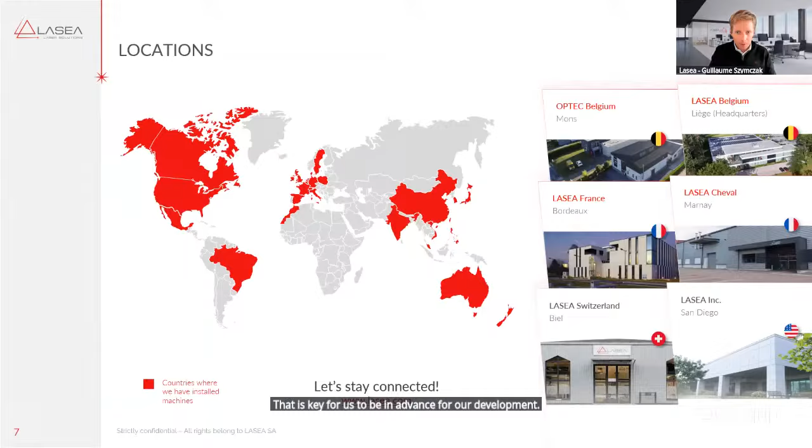And finally two sites in France: one is LASEA Cheval, which we acquired about two years ago, and Lasea France, where I am located, where we also develop modules that we integrate into our machines, but can also sell outside the group. The module we'll talk about today is developed by the French entity. In terms of markets, there are three main ones: luxury, everything linked to watches and jewelry; medtech, mainly tubes like stents, catheters, and intraocular implants; and finally electronics, where we do plenty of stuff like micro drilling, selective ablation, engraving, and so on. All of this is supported by the research and academic environment that is key for us to stay ahead in our development. We have machines all over the world, and here's a picture of our office.

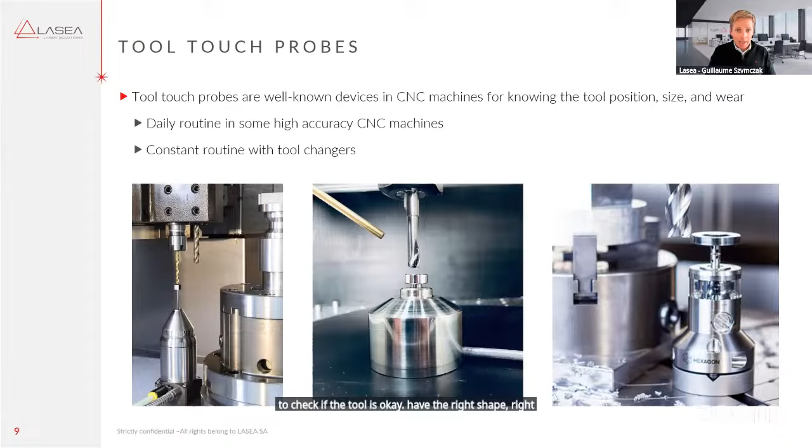Let's talk about Tool Touch Probes. Today, in the state of the art for CNC machines, the Tool Touch Probe is very well known. Everyone knows that the tool is something that needs to be changed—it's a wear part, and this part has a definite impact on the quality of the part you produce. It's very common in CNC machines to have a daily routine to check if the tool is okay, has the right shape and performance, and to be sure the machine is in good condition. But what about laser systems?

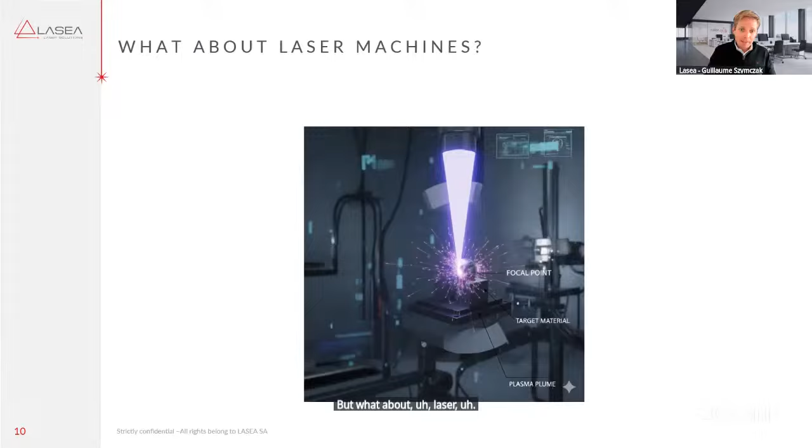In laser systems, we have an issue because our real tool is light, but the light we want to use is at the focal point, as you can see in the picture.

And this is where you have interaction between the light and the material. So if you put any tool in, you have a risk to damage it. So what is commonly done, in fact, we do a lot of assumptions at the end of the day.

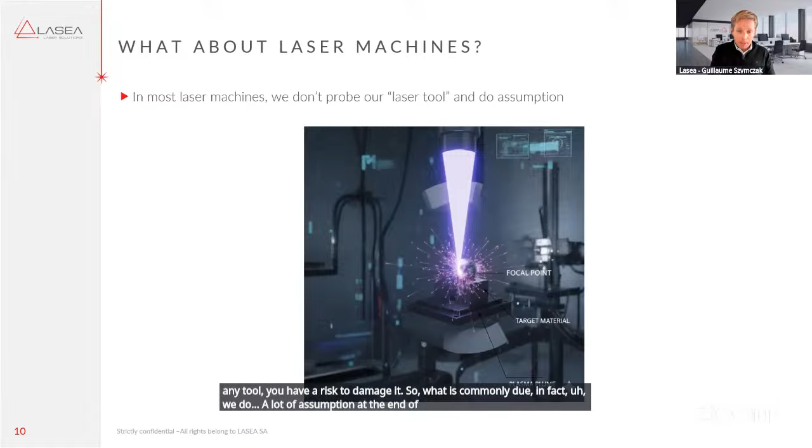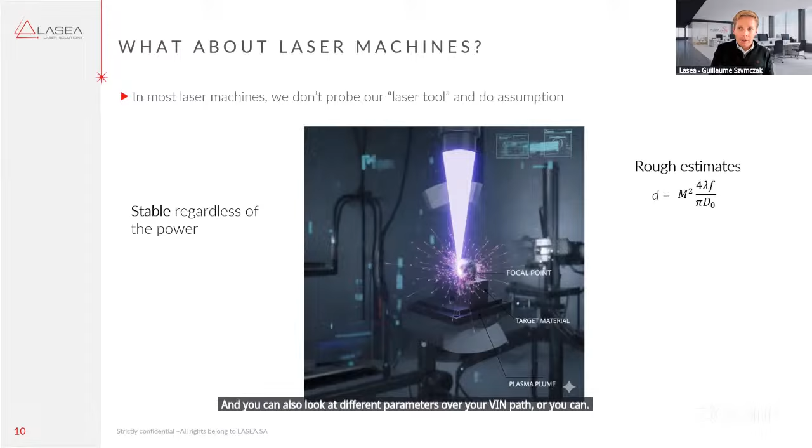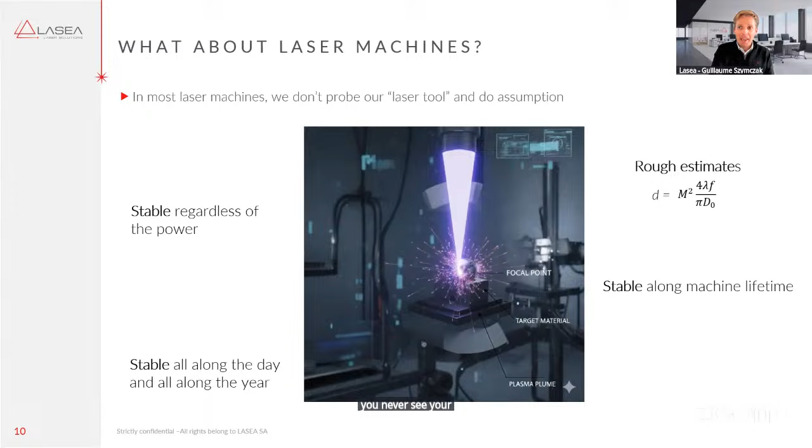Because we can first of all make rough estimations about what the focal point can look like with some mathematical formula based on the optical path. You can also look at different parameters over your beam path, or even monitor over the lifetime of the machine or over the day. Or you can attenuate the beam just to try to see what happens at the focal point. But at the end of the day, you never see your tool. You just estimate or try to expect what your tool looks like.

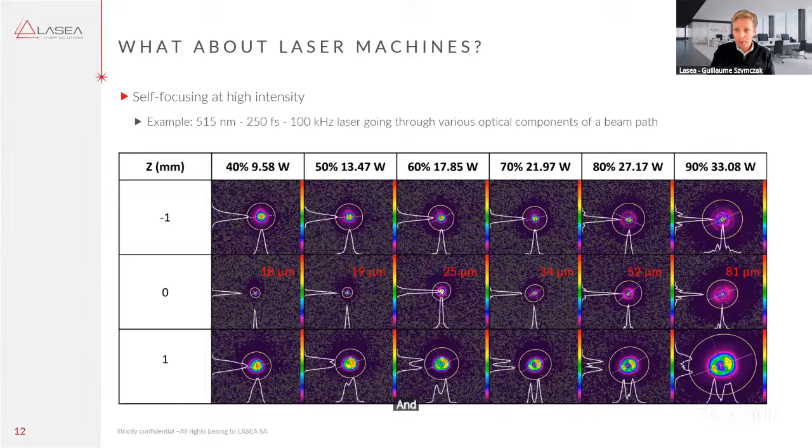But if you start to measure it, you can see that the more you increase the power, the more you see things change all over the process of increasing your power. And here at 33 watts, you can see that your beam, and also at powers in between, your beam changes, the beam size changes, and so on. You don't have the same thing as at the beginning.

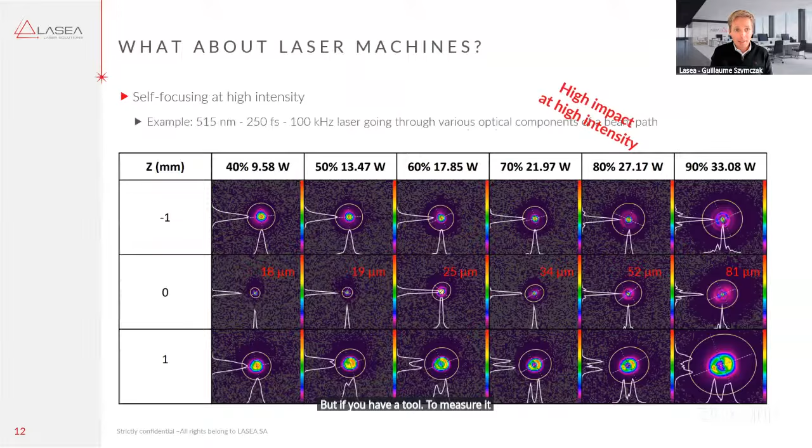This is definitely an issue linked to self-focusing at high intensity. So as you measure your beam at very low power, you increase your process and you start to use your tool at the end with the wrong beam profile. The result is that you are not really satisfied with the result. So you try to optimize parameters and work on your jobs to compensate for this deviation. But if you have a tool to measure it, you will definitely use less time trying to develop your process or compensate for things that were working at low power.

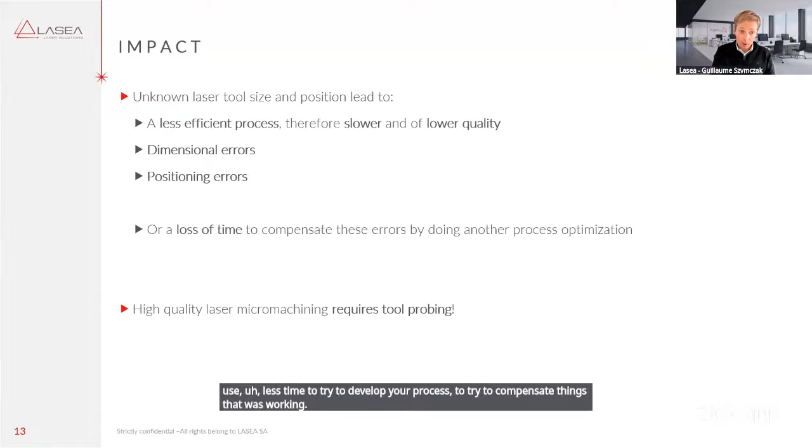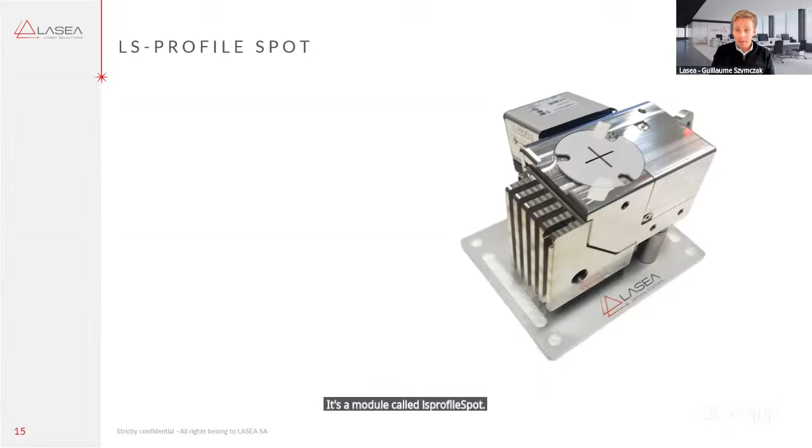So that's why the probing process is key. Our solution, what we bring today to the market, is a module called LS Profile Spot. It's a module, so you can see the cross - this is where you can place your focal point. You can use it at 100 watts, 1 millijoule using ultrafast laser. We even tested it up to higher values, but for more short term use. We are still improving this kind of thing, but it will soon be possible to use it at 300 watts, 500 watts, very high levels of energy.

You can measure spot size around 16 microns for very good quality. You can definitely go lower, but there is a norm to measure the spot size. Based on the camera that we have today, we recommend measuring a spot around 16 microns. And this tool can be used for any type of wavelength.

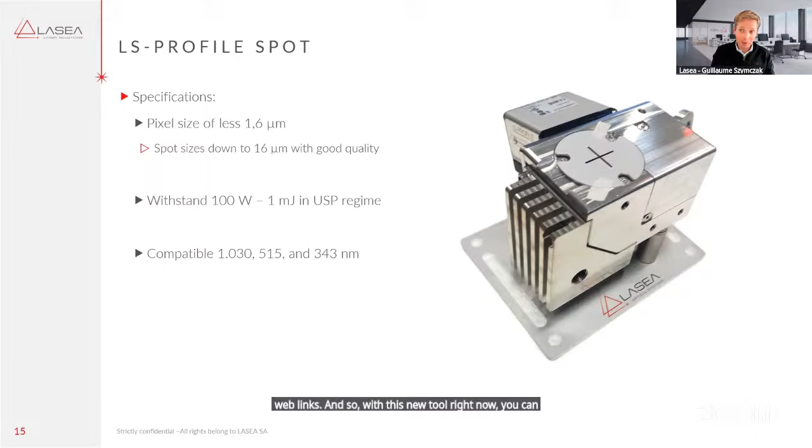So with this new tool right now, you can definitely probe your tool and see what's happened, thanks also to the software that we developed to help use this tool. One of the key elements is automatic detection in the camera field, because as you are looking for quite small spots, it's not so easy to detect the point. The software automatically detects it. There's a lot of automatic processes that happen, so at the end it's really a plug and play system that allows you to measure the spot size, not only in terms of size, but you can also track the position of your tool over different routines, and record data to see if your beam is stable over time.

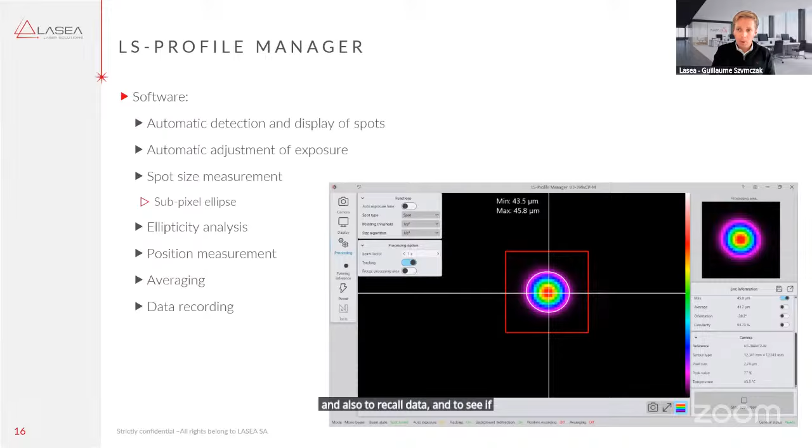And from time to time, we move the stages just to check if the spot size is okay. And if it's okay, we can launch jobs and make the production.

Another integration that we did in our new machine, the Neo machine, where we have two heads and two parts that are processed in parallel. Here it's definitely key to be sure that both heads have the same beam quality and the positioning is still at the same area. So again, we have some routine going left or right before launching jobs, to check the beam and to monitor it over the production.

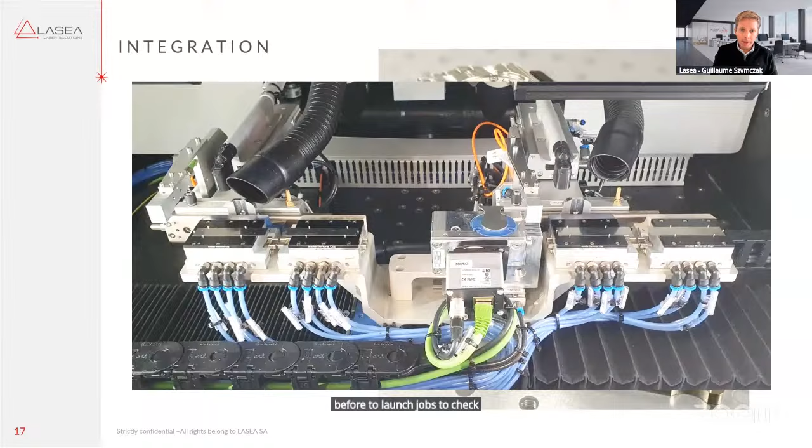And finally, a last example where you have in the middle, again, the processing area, and on the left, the camera.

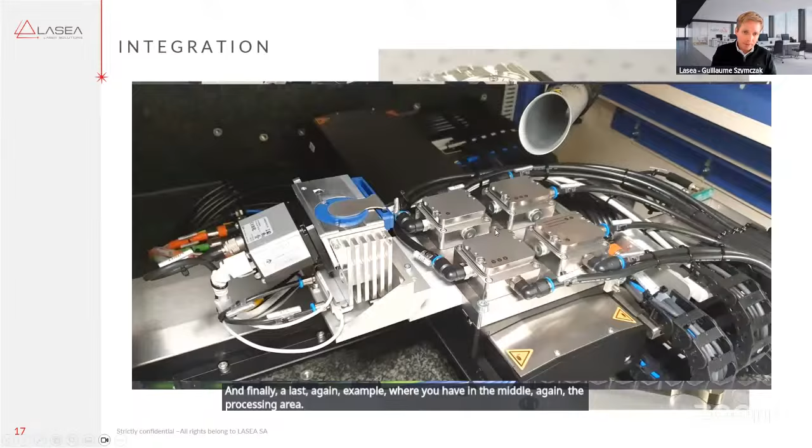So today, tool probing, it's possible. You can definitely find a tool available on the market, on the shelf, to check your tool using ultrafast laser, high power. It's also possible. Green UV wavelengths, it's accessible also with the same module. And this gives you the possibility to track the beam at the focal point.

So this is it for me for today. Thanks a lot, and if you have any question, feel free.

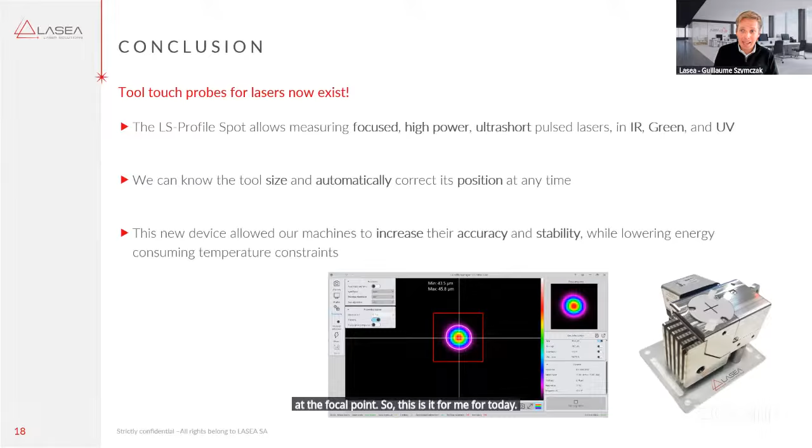I can perhaps start with a question about the frequency of the measurement. Perhaps you know more your case, the case of LASEA, right? How often do you need to check your spots?

So today we launch routines, like in fact a CNC machine, just before starting a production. That's definitely a key moment where we measure the spot at the focal point, just to be sure that the machine with all the different sensors is ready. And then if you have a very, very long production, maybe in the middle or every X minutes, you can check it. And it's a very easy and fast measurement. In fact, as we put it on very fast stages, it's a matter of, let's say, maybe one minute maximum. But yes, it's very fast.

And any idea of going toward a kind of live measurement in the future, having a beam splitter that sends some part of the beam? It's something that we have in mind, to have a live measurement and live adjustment of the machine to avoid any drift. So today, already with this tool, we have some back calculation, especially if we see a small drift of the beam positioning. Right now, our machines are capable of taking this drift and compensating for it. We put some limits to avoid any big drift that can be caused by, I don't know, external reasons, but all the minor drifts are today compensated. And this is how today we reach machines with repeatability less than 2 microns.

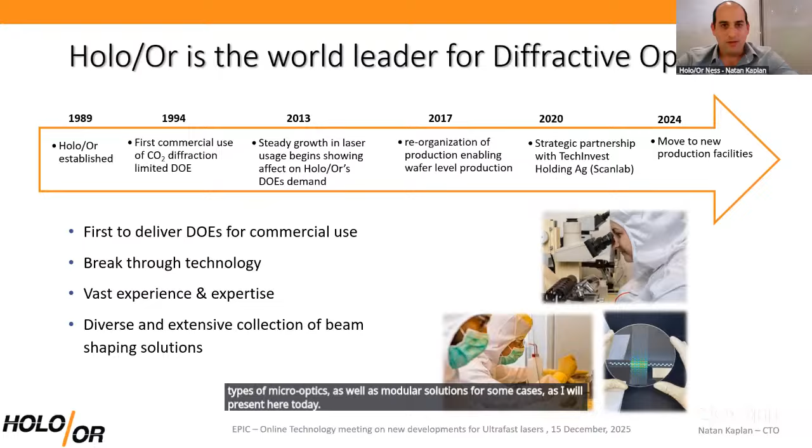So, as I said, HoloOr develops DOEs. For those of us less aware of what DOEs are, these are thin, purely phase windows. We mostly do transmissive, but we can also do reflective for customers that want to. Typically they are done on fused silica for the wavelengths discussed for ultra-short laser pulses. These windows are very thin, they have almost no temporal aberration, no chromatic dispersion. Therefore they don't ruin the ultra-short pulses and are very useful for shaping applications. Instead of having 20 millimeters of glass, you can often have 1 or 2 millimeters of DOE thickness.

The magic they do is by having a phase profile etched on their faces. Here, we do it in-house using lithographic methods with very good accuracy. Therefore, the elements themselves have absolute angular precision—well, nothing is absolute, but 10 to the -5 or -6, which is practically absolute angular precision due to the fact that it's lithographic tolerances. They have high laser damage thresholds, similar to a fused silica window coated with good coating, and they are very thin and compact. One of the main advantages is you can combine multiple optical functions—for example, a diffractive lens with a diffractive prism with a beam shaper or a multispot, in a single surface.

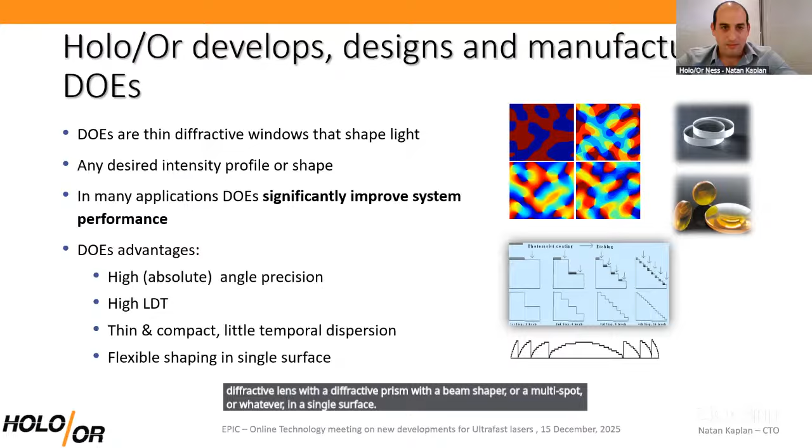Mostly HoloOr has three main product families: beam splitters that split a beam into an array of sub-beams or spots at the focus plane of the f-theta; beam shapers, which shape a beam either analytically, if it's a single mode beam, or statistically through controlled flat top diffusion; and beam foci elements that manipulate the beam along the depth of focus, which is what I will discuss today. For example, the simplest ones are diffractive axicons, which generate a Bessel beam that has a depth of focus much larger than a standard Gaussian beam.

We also have multifocal, tilted beams, airy beams, whatever the customers need.

Before I delve into the specifics of the VB module objective, I was asked to address the classic EPIC question: what HoloOr can do for you, and what you can do for HoloOr.

What can HoloOr do for you? We can provide high laser damage threshold DOEs and micro optics per requirement. We also have a huge catalog, and you're welcome to visit our website. We can simulate our optics in your system, including Zemax integration for many of the optics. And we like solving complicated beam shaping challenges, illumination on inclined planes, and various other exotic cases.

What can you do for HoloOr? You can give us beam shaping challenges that are interesting and useful to solve, and do application tests with our DOEs. We are often open to the idea that you receive the DOEs at a significant discount, or basically at cost, if you're willing to let us use the results for marketing cases. And we're always looking for partners that cooperate in European projects within the Horizon Europe framework, especially if the project has a laser task that requires some sort of beam shaping or other type of phase manipulation, such as Shack-Hartmann, etc. Could be anything.

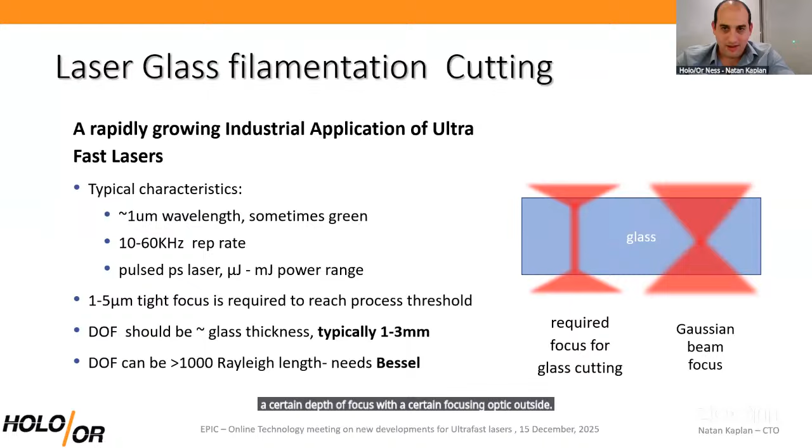Now, many of our customers, first of all, want a full solution. They don't want to add their own external objective. Second, they are not sure what process parameters they need to get the glass cutting or glass processing done, or sometimes it's just modification. Because you sometimes have different materials, different thicknesses, and as all of you who have tried to develop a laser process know, it's complicated. So any degree of freedom helps a lot.

We heard this requirement, and we developed the VB glass cutting module, or VB variable Bessel objective. The idea is that you have an optic, which is a module, that does everything. You just need to come into it with any beam size from 3 to 8 millimeters, and at the work distance, which is 7 millimeters after the edge of the module, typical for such high magnification objectives, you will get a Bessel depth of focus region, as you see here below the graph.

By rotating this ring, you get a variable depth of focus around the same work distance. There is a slight work distance shift of 0.1 millimeter from one edge to another, but generally you get the same lobe. The Bessel lobe is not imaged, so it always stays the same 2 microns along all the variable depths of focus. Even if you are working with an 80 micron depth of focus or 1.5 millimeters in air, everywhere you get the same Bessel objective.

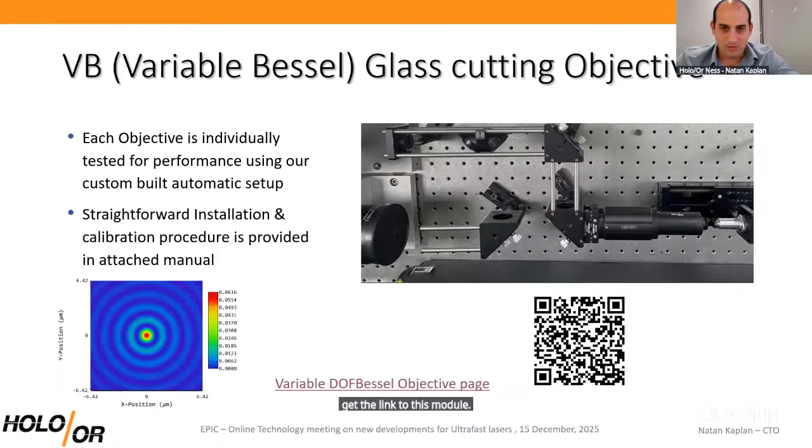So that's it. Thank you for allowing me to present, and feel free to ask questions.

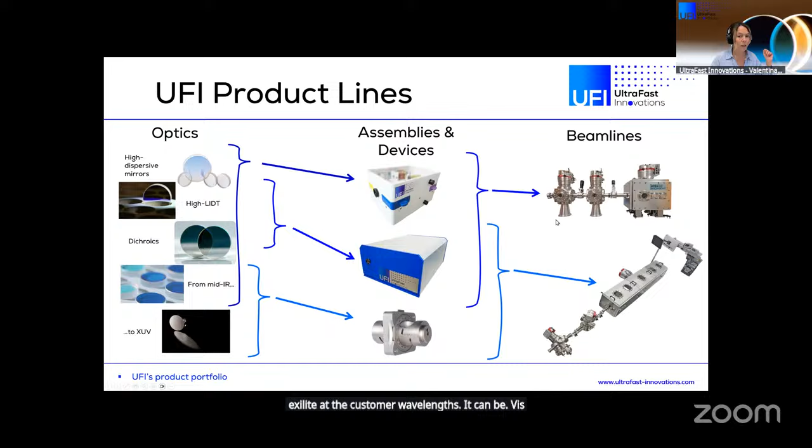We assemble them into devices for pulse characterization and manipulation of the spectrum of the pulse or the pulse polarization. And these devices we can even assemble into entire beam lines, which cover everything from post-compression of the laser to the generation of coherent XUV light at the customer wavelengths. It can be visible, ultraviolet, it can be soft X-ray, water window harmonics.

And before we go to the new developments, I want to go through our device product line again, which covers a broad range of parameters.

So basically, we can start from the laser cavity and characterize the contrast of the laser pulses up to 14 orders of magnitude. And then we can take these picosecond, sub-picosecond pulses, broaden them in multiple stages, and generate few femtosecond pulses, just one cycle of the optical field.

We focus them down in our XUV beam lines, either in the enhancement cavity, if we talk about megahertz repetition rate and small energies, or single pass through the gas jet, if we talk about millijoule level of energies, and reach up to kiloelectron volts, which can also be measured with our in-house built spectrometer, which we call Everest.

And on top of it, we can provide extra means of characterization and manipulation with XUV pulses or infrared pulses. We also produce devices which allow us to have feedback on the optical components which we produce: Glacier and Gobi, a white light interferometer and a cavity ring down reflectometer.

So to this already very diverse range of products, this year we added 5 new ones, and I'm going to briefly introduce them today. Feel free to reach me after this meeting if you're interested in any of them.

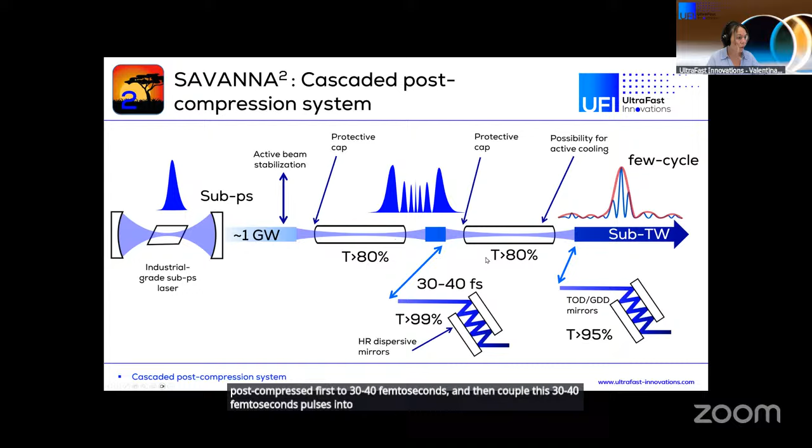And in this arrangement, we can enter with an industrial sub-picosecond 1 micron laser, post-compress it first to 30-40 femtoseconds, and then couple these 30-40 femtosecond pulses into the second post-compression stage and reach the few cycle regime.

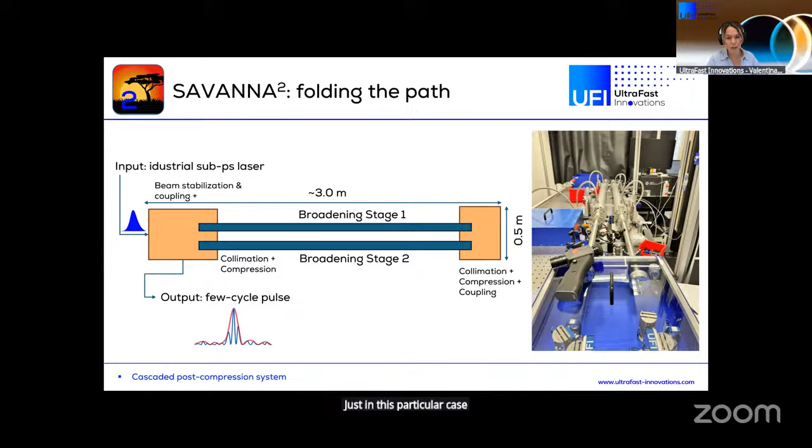Here I want to point out that we are working with different technological solutions. It's not necessary to be fibers; we're also working with multipass cells. Just in this particular case, to demonstrate the capabilities of the systems, we went with the 2-fiber solution.

At the end, we reached post-compression factors of 30 to 35. Our initial pulses were slightly longer than 170 femtoseconds, and the pulses at the output were as short as 5.7 femtoseconds. Here you can see the full spectrum of the system, but unfortunately we do not currently have the right mirrors to compress the full spectrum. Our mirrors cover only 700 to 1300 nanometers, but we are working on a new generation of chirped mirrors to cover the full spectrum range and demonstrate even shorter pulses from the same system, hopefully.

Another limitation here is the measurement techniques available on the market, because we want to be oriented towards commercial products, not customized built systems for pulse characterization. The overall transmission of such a cascaded system is above 60%, which is quite good for optical fibers, and the footprint is only 50 by 300 centimeters.

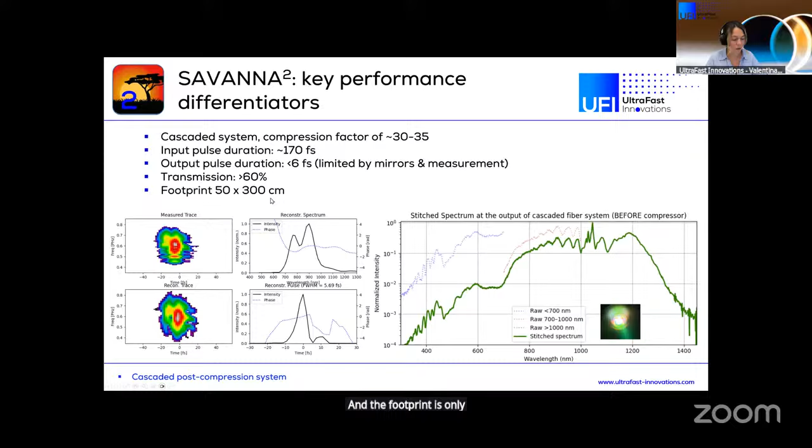This system works with linear polarization, but if one wants to work with circular or elliptical polarization, or switch between them easily within the experiment, we can provide a solution for this too. Here is Kawaii. It's a reflective-based quarter wave plate, which consists of several mirrors arranged in a way that they introduce a retardation of a quarter of the wavelength when the device is rotated to 45 degrees.

There is an internal rotational stage inside, motorized, controlled by software. And the beauty of this device is that it works in the spectral range over the octave, and it doesn't introduce extra dispersion into the pulse. The GDD value is limited to 3 square femtoseconds, which means it's suitable for few-cycle pulses or broadband OPAs and OPCPAs.

A lot of people here were talking already about micromachining, and when people work with micromachining, it's not only ytterbium lasers themselves but also optical harmonics from these lasers. Nowadays, people are exploring which pulse duration would be more beneficial for micromachining, which one would give a cleaner cut and smaller features, reducing thermal ablation effects.

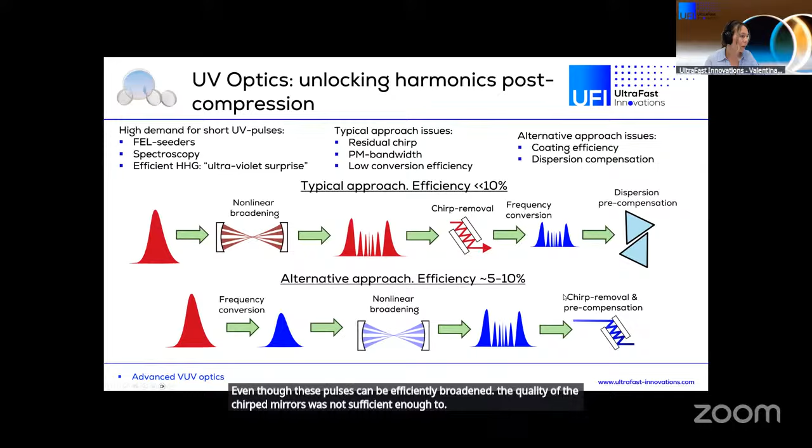There are big achievements already in this field when we talk about 1 micron. When we talk about harmonics, especially third and fourth optical harmonics, the limitations here are optical coatings for the post-compression of these pulses. Even though these pulses can be efficiently broadened, the quality of the chirped mirrors was not sufficient to efficiently compress the pulses after nonlinear spectral broadening.

Besides that, as I mentioned, we are working on cleaning the contrast of the pulses, which is also potentially a big problem for micromachining, because even though this contrast is orders of magnitude lower in intensity than the main peak, it still might contain a significant fraction of energy from a few percent up to 20%, depending on the laser system. Our solution here is to shift the central laser wavelength from the spectral region where there is amplified spontaneous emission and coherent background from the stretcher and compressor, towards the red side.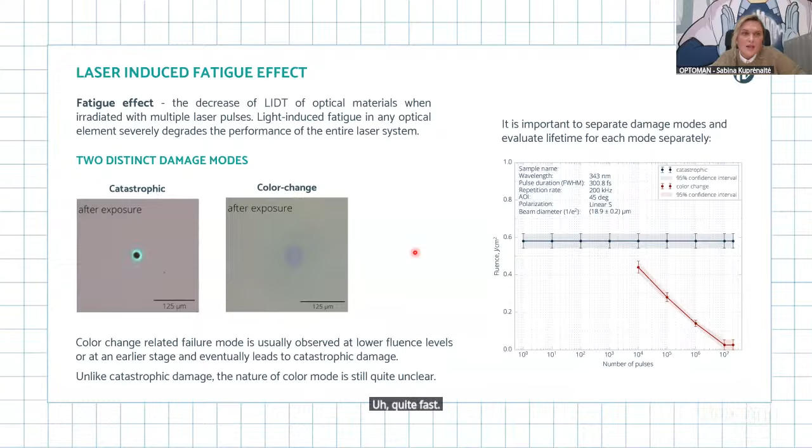So let me just, okay. So, I'm sorry.

So what is the degradation effect on the ultrafast laser operation? Basically it limits the lifetime, causes unexpected downtime and maintenance, and increases the total cost of ownership. It's a major bottleneck for UV laser systems. So like any high performance system, optical coatings must be trained for endurance. How can we build this strength into the coating? Can exercising help, or meditation, or psychotherapy sessions? Actually, we don't know, but we think the answer starts with first understanding the failure itself.

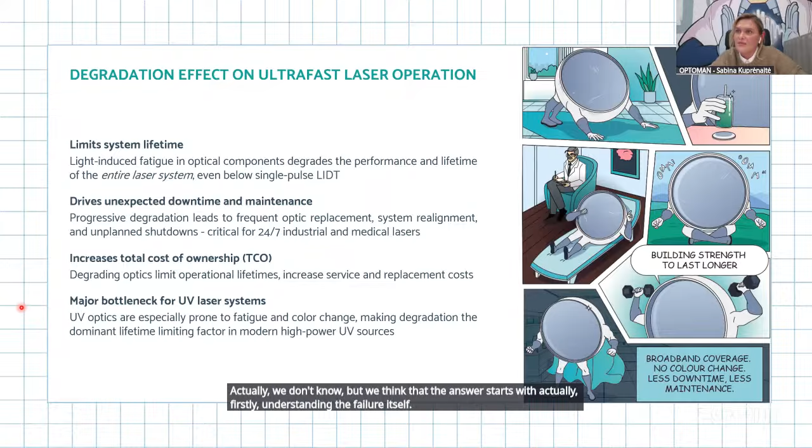So we performed a detailed analysis of the color damage site. Here you can see high contrast images showing typical morphology before and after exposure. We performed XPS analysis to estimate the stoichiometry of the color change free area and the color change area. We noticed that the color change free area had stoichiometric silicon dioxide, while the color change area had about 20% silicon oxide with oxygen deficiency. This deficiency can cause localized absorption and finally the degradation and damage.

One of the other tests we did was a FIB cross-section and elemental analysis of the damaged sites. Even though the elemental analysis is qualitative, not quantitative, it confirmed the oxygen deficiency. We saw that there is an oxygen deficiency, especially at the first layers of the coating, the top layers.

We performed many more analyses than I presented here today, and we understood the origin of the degradation. So we decided that the next step should be an action.

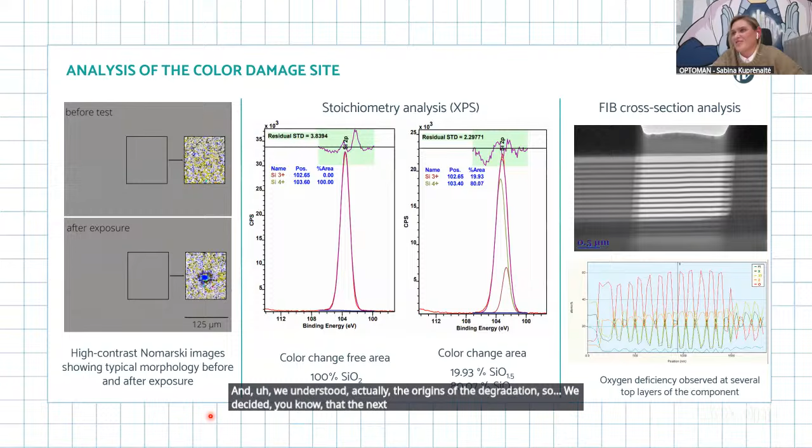Here is the standard design and materials that we were using, and the LIDT measurements of our standard component. We thought we would move to coating design modifications at first. We managed to increase the catastrophic damage threshold, but you can see that the color mode is still there and it's quite harsh. We managed to delay the color change a bit, but still it was not enough.

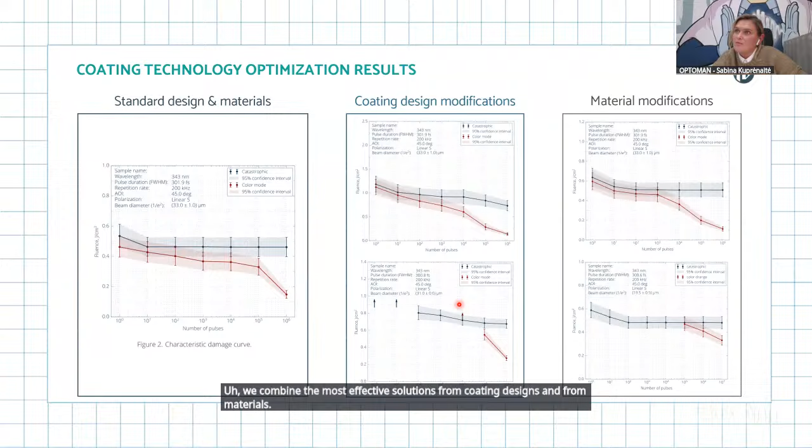We decided to move to material modification. After several iterations, we managed to delay the color change quite a lot and reduce it, but still it was not sufficient. So building on all the findings from the experiments, we combined the most effective solutions from coating designs and materials. Here is how the best of both worlds looks like. We performed coating design and material modifications, and we managed to obtain coatings without color change.

So today, LIDT measurement service providers such as Lidaris can use their measurement characteristics to extrapolate the lifetime. Here is the extrapolation of the lifetime, and this enables reliable lifetime prediction.

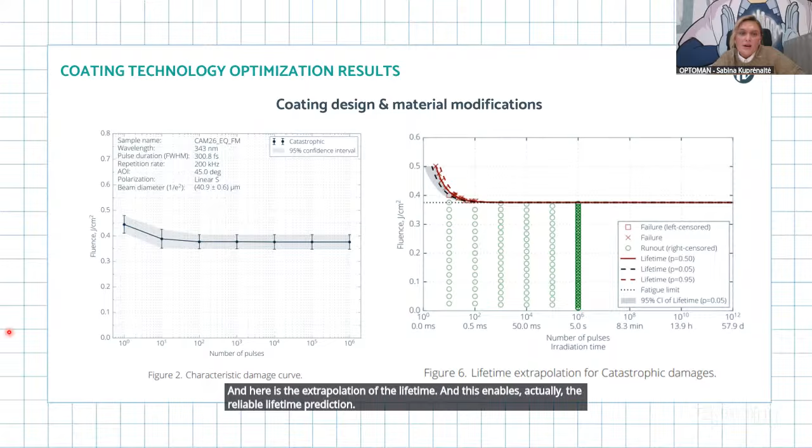Another nice, unexpected effect of this technology was the increase in thermal conductivity. The samples were tested in a femtosecond laser system, and the client tested 2 mirrors from competitors. Here is mirror 1 with a notable increase of temperature. Competitor number 2's mirror had a slight increase of temperature, and Optoman's non-degrading mirror had no increase of temperature. What's interesting is that the absorption of Optoman's mirror was higher than the competitor's mirror, 82 ppm compared to almost 57 ppm. But still, thermovisual measurements showed that this non-degrading technology might result in better thermal conductivity.

So I would like to complete with a proud note, that our non-degrading technology won the Innovation Award at the Laser World of Photonics in Munich in 2025. We are super happy about that. If you have questions, they're welcome, and thank you for your attention.

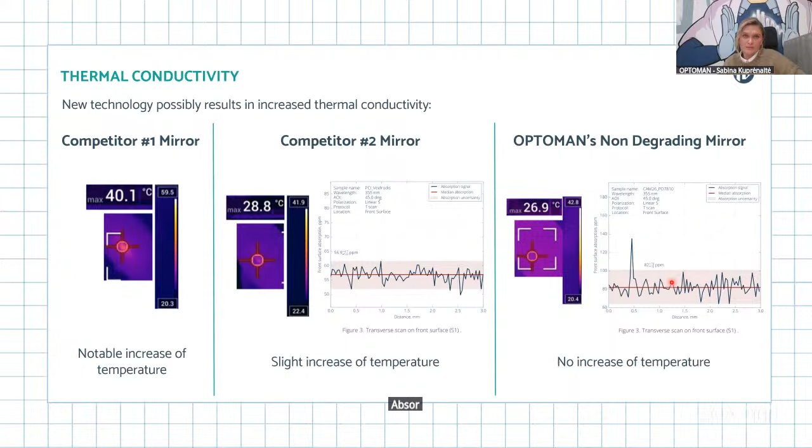What metrology did you take for that? So how did you measure it? It's PCI. We measured it also in Lidaris, so we outsourced it also. So they used photothermal common path interferometry to measure absorption. Okay, thank you.

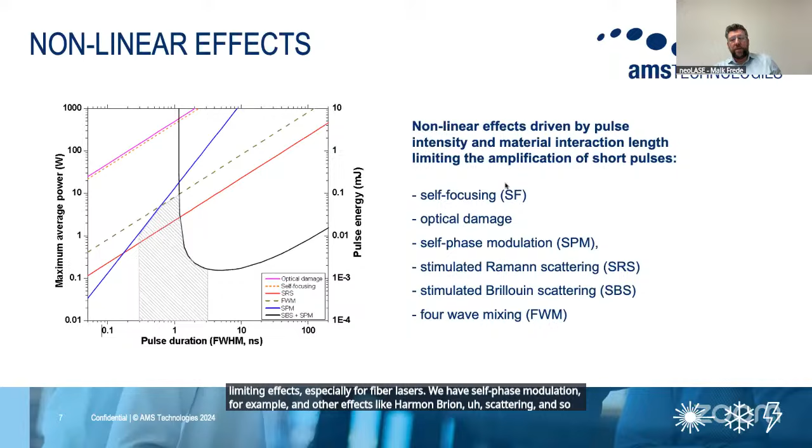If we take this into account again and compare that with our different amplifier concepts, we can distinguish a little bit between which kinds of amplifiers can be used for, let's say, medium average power scaling, where we still have high gain but reduced nonlinearities and reduced nonlinear effects.

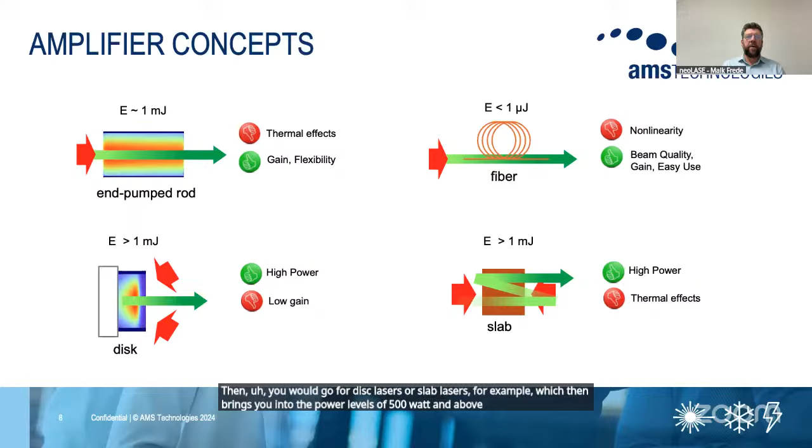We went with the end-pump rod solution, which allows us to amplify milliwatt input ranges up to a few hundred watt power levels and up to millijoule pulse energies, which cannot be covered by fiber, and which is still quite an efficient concept. If you want to go to higher power levels, you'd go for disc lasers or slab lasers, which brings you into power levels of 500 watts and above, and even much higher pulse energy levels.

Over the past we developed quite a lot of different amplifier units. The typical start was neodymium vanadate, a 1064 nanometer based amplifier system, neodymium vanadate or neodymium YAG, which has very high gain. We do more than 40 dB out of a pre-amplifier unit, but it's limited in pulse duration at some point due to the spectral bandwidth of the gain material. So we went for ytterbium YAG, which gives us a much broader spectrum and therefore also supports femtosecond laser pulses.

We also did a little work in the range of 2 micron, 1940 by thulium, as well as 2050 by holmium. You see there's a little family of different amplifier systems below, starting from low power milliwatt input levels, where we can directly couple a fiber-coupled mode-locked fiber oscillator and amplify that. Then there are free space units which can be cascaded to scale the power into higher power levels.

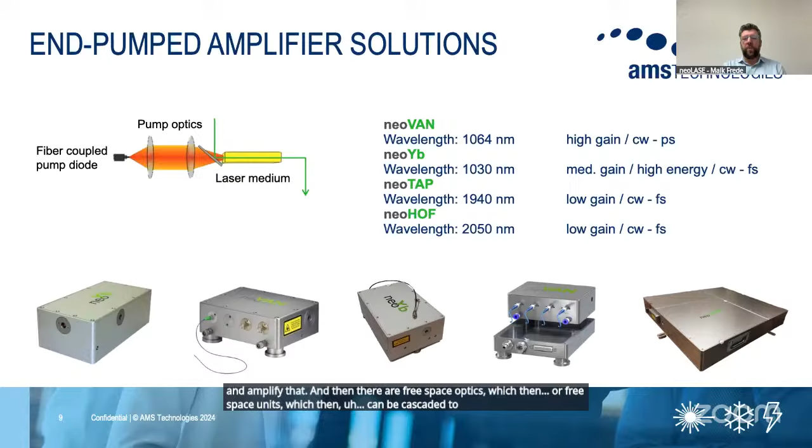I brought some examples here. All of this is based on a very modular approach that lets you cascade different amplifier units to address different pulse energy or average power levels.

We typically start with a femtosecond mode-locked fiber oscillator, which covers pulse durations in the range of 500 femtoseconds, typically chirped to about 50 picoseconds. Average power levels are 5 to 50 milliwatts depending on the rep rate, typically around 30, 40, or 50 megahertz repetition rate, which is then pulse picked and amplified.

When we cascade our ytterbium amplifier systems, we can cover different average power ranges from 10 to 200 watts depending on the number of stages. Pulse energies go to more than 1 millijoule. One interesting point here is also amplification of high rep rate systems.

We do quite a lot of gigahertz system amplification, where we can do CPA-free amplification. Due to the low interaction lengths and low nonlinearities, the laser crystals or laser modules can support up to 50 microjoule in a CPA-free regime, meaning we can directly amplify Fourier limited pulses up to 50 microjoule of pulse energy.

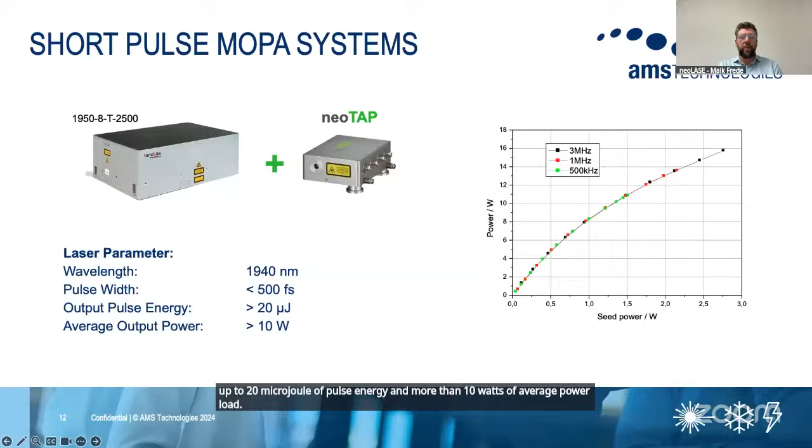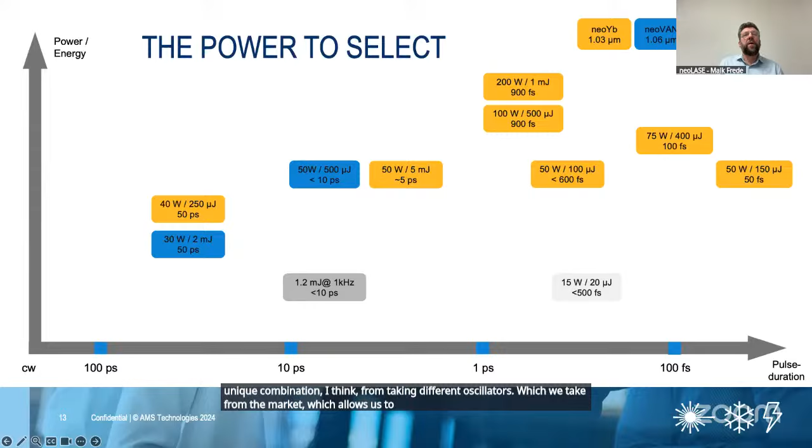So giving you an overview with a summary of systems, what we have done in the past, which are all supported by this unique combination of taking different oscillators from the market, which allows us to address quite a few different pulse duration ranges and combine that with our amplifier systems or even nonlinear compression cells. So we can cover the range from a few tens or hundreds of picoseconds, going down here.

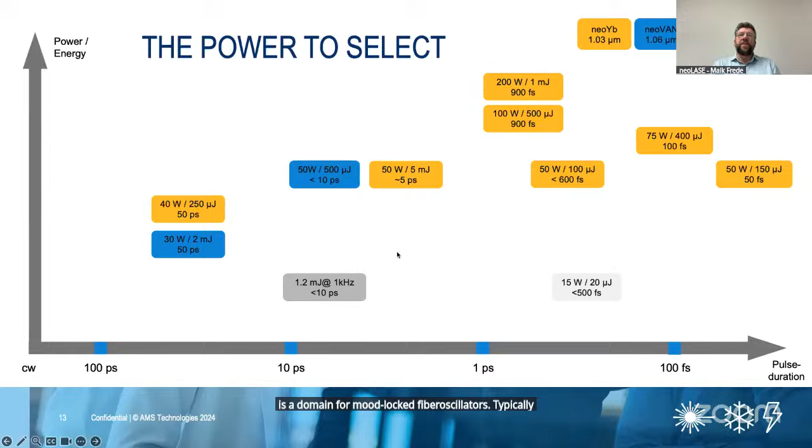50 picoseconds is a gain switched laser diode, which supports this pulse duration range. Going further down, 10 picoseconds and below is a domain for mode-locked fiber oscillators typically. With the neodymium platform, we are limited in pulse duration to about a few picoseconds. With the ytterbium platform, you can go down to 900 femtoseconds or below, depending on the gain narrowing in the laser material. And with the compression cells, as mentioned, we can go down to 100 or even 50 femtoseconds. Everything is based on a modular approach of these different systems.

And with that, I want to finish my talk, and thanks for your attention. I'm open for questions.

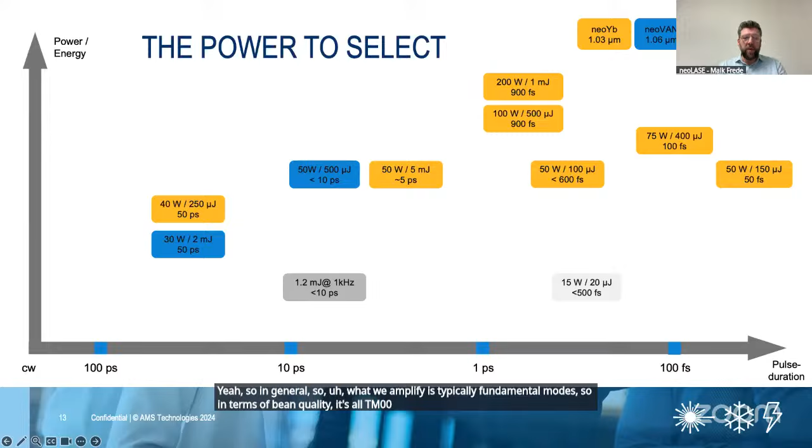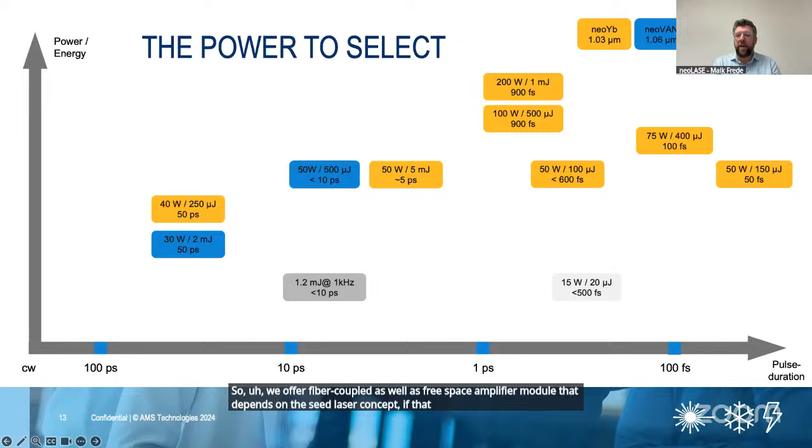Yeah, so in general, what we amplify is typically fundamental mode. So in terms of beam quality, it's all TEM00 fundamental mode beam quality. We offer fiber coupled as well as free space amplifier modules. That depends on the seed laser concept. If that is already free space, then it's typically easier to directly take the free space one. If it is a mode-locked fiber oscillator, for example, then you can directly couple that via the fiber into our amplifier module, which is for sure the cleanest and easiest interface also.

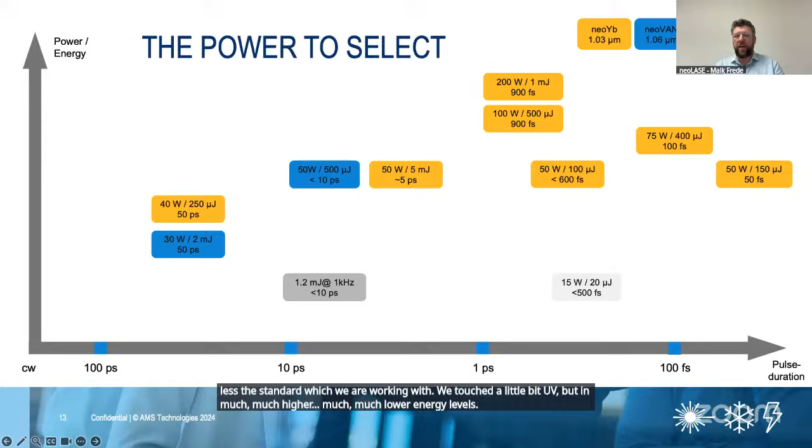Yeah, we typically see 50% frequency conversion to the green. This is more or less the standard which we are working with. We touched a little bit on UV, but at much lower energy levels. So typically, as I said, 50% for infrared to green.

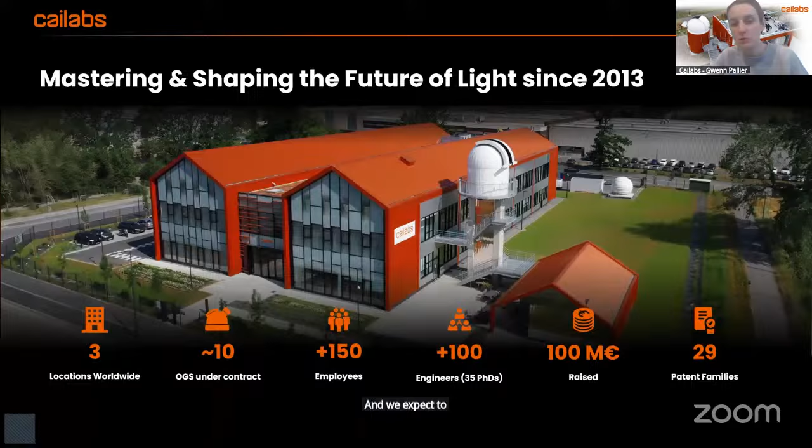We are actually more than 170 now, if I'm not wrong. We are opening a new factory in 2027. It's going to be 10,000 more square meters, and we expect to reach something like 300 employees by then. So those are our main areas of activity.

Aerospace and defense is actually our main business with this optical ground station that we are selling. Our legacy product is on fiber network, but I myself work for now only on laser processing. And today we are here to discuss especially microprocessing.

So why do we do beam stabilization? That's what I want to start my story with. At Cailabs, we do beam shaping, and we wanted to shape ultra short pulse lasers. But the thing is that they are actually monomode laser, and if you want to shape a monomode laser, it's actually a little bit challenging. If your input is moving a little or changing a little, it's actually changing the output a lot, which is then not stable.

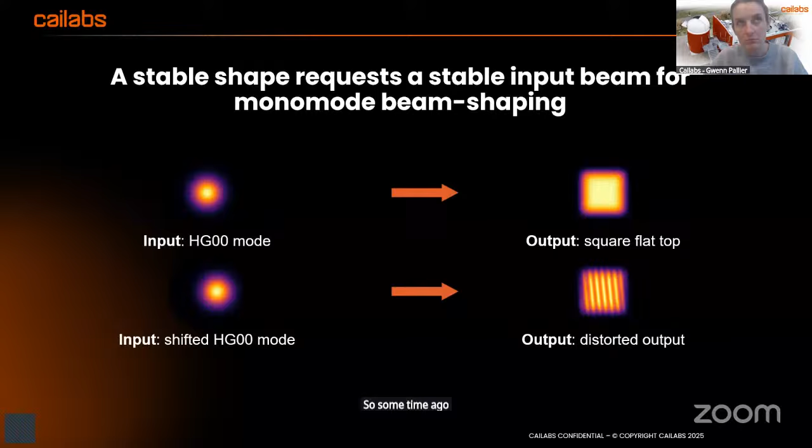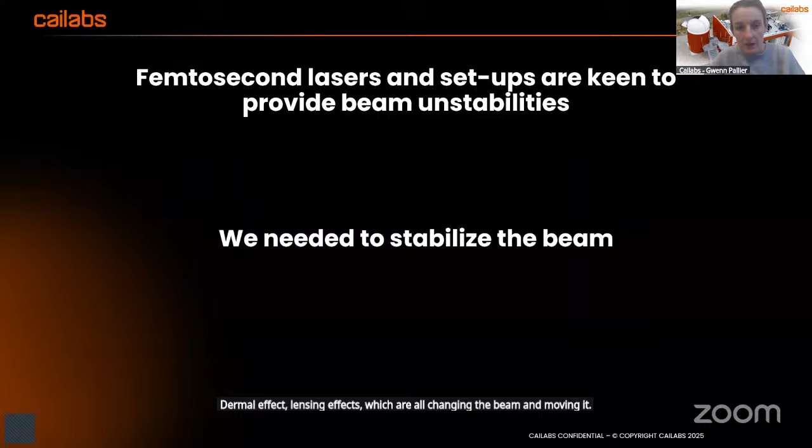Some time ago, like 7 years ago, we said okay, we have to look at that, because one main issue is that femtosecond lasers and the setups are keen to provide beam instabilities. What does it mean? It means that typically when you change your laser power or your rep rate, it will move the waist in position and size. And in the setup, as discussed before, you have thermal effects, lensing effects, which are all changing the beam and moving it. So we needed to stabilize it if we wanted to do proper beam shaping. That's actually what we did.

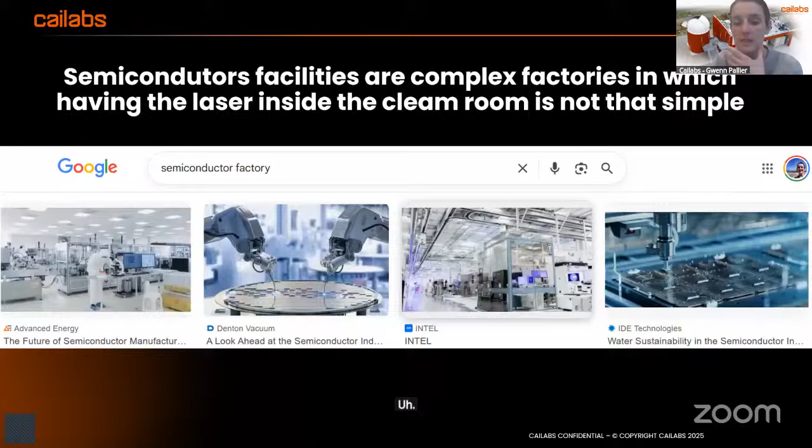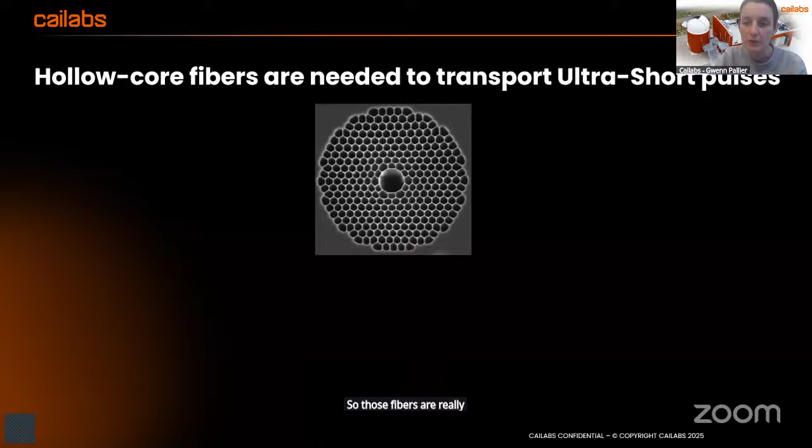If you want to fiber a femtosecond laser, you have no choice but to go to hollow core fiber. Those fibers are really the best option to carry ultra-short pulses, but they can get damaged easily, so they may not be that compatible with factory environments.

And when I say factory environment, I mean thermal instabilities on the beam path, or the laser parameters being changed and impacting the beam pointing.

So the current solution to that problem is active stabilization. Active stabilization is basically two mirrors which are moving. A little bit of the light is measured, and when the beam is depointing, it compensates for the beam depointing. This is good, but it can only work at the speed of the sensor and the speed of the actuator moving the mirrors.

We can do beam stabilization at the speed of light, because in the end it's fully passive. The beam is always stabilized, and we can compensate for any instability, as I was saying before.

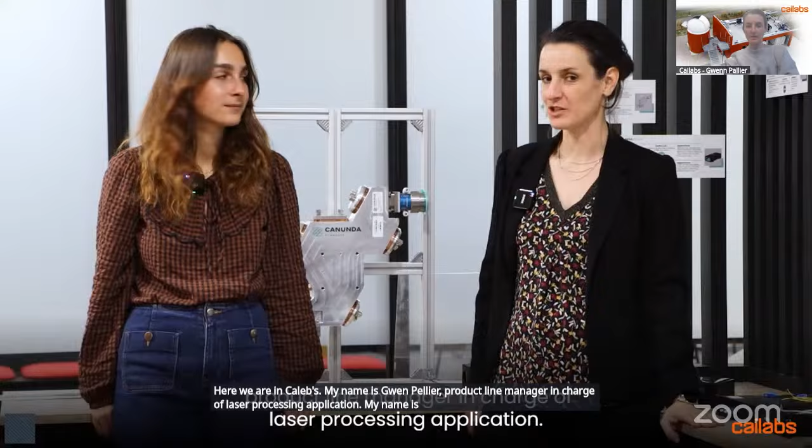Here we are in Cailabs. My name is Gwenn Pallier, Product Line Manager in charge of laser processing applications. My name is Jeanne Broussou, and I'm in the technical team. Today we want to show you how Canunda USP Pure Beam works.

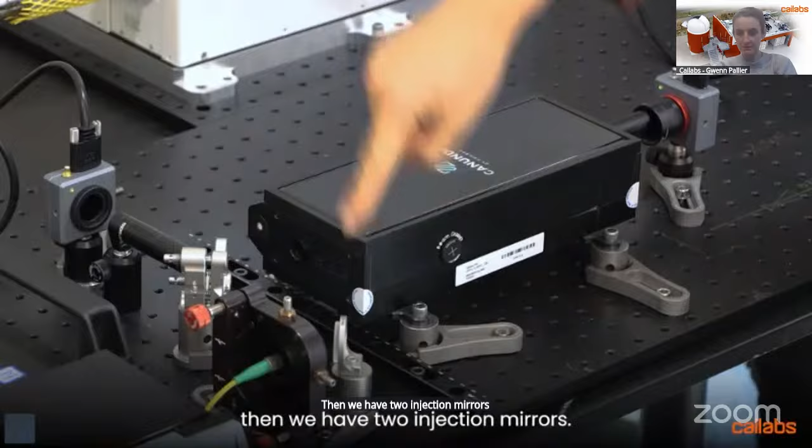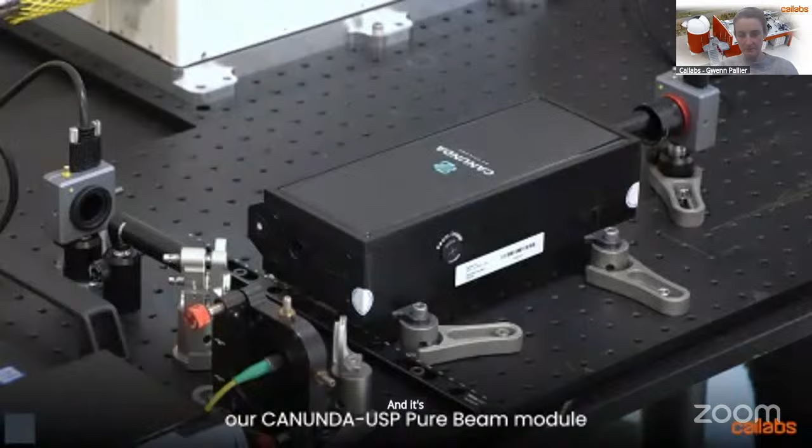Let's go. With Jan, we want to start by showing you a very simple setup. There's a source, then two injection mirrors. We extract a little bit of the light, which goes onto a first camera and a first computer. Then the light is injected into our Canunda USP Pure Beam module, and goes to a second camera on another computer. Let's start the demo now, please, Jan.

Could you please move the source quite a lot, about a waist? The idea is to look at what's happening when we are not stabilizing the beam, and what's happening when we are stabilizing the beam.

Okay, let's look more into detail at the screens and the numbers. Can you please tell us the beam dimensions? The waist of the beam before the module is 25 microns, and the waist of the beam after the module is 35 microns.

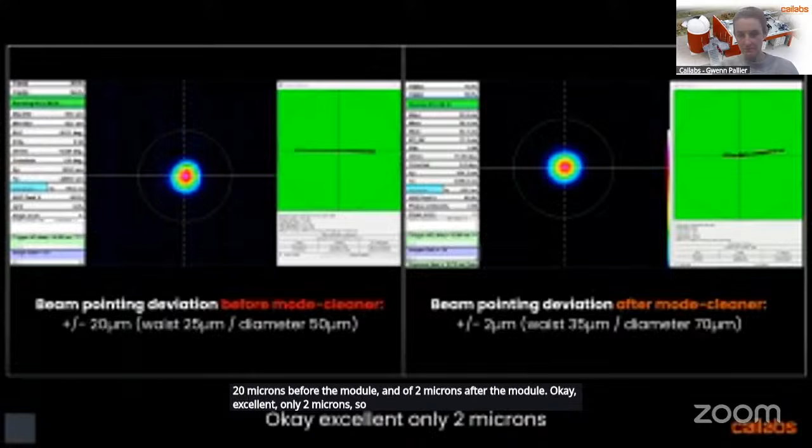How much has the beam moved before and after the module? The beam has moved 20 microns before the module and 2 microns after the module. Excellent, only 2 microns—more than 10 times less movement. We are really stabilizing the beam. Yeah, it's really great. That's the real principle of Canunda USP Pure Beam.

When the beam is moving at the input, it's not moving at the output. And it's fully passive. As you can see, there are no cables at all.

Let's continue now the demo with fiber launching. After our Canunda USP pure beam, the beam goes to 2 mirrors and then is injected into the Photonic Tools module. This module injects into that hollow core fiber, which goes to that laser head and to that camera, and we are looking at the camera onto that computer.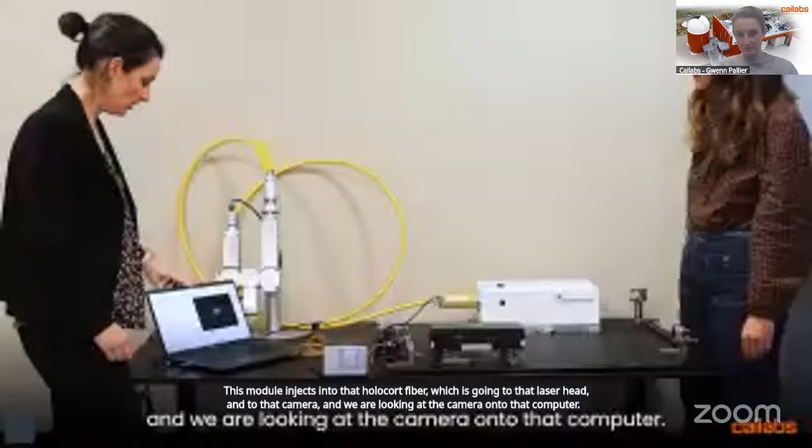Hollow core fibers are really beautiful, but they are very sensitive. If the beam is not injected perfectly into the core, when you have high power, you are actually damaging the fiber. Can you show us now what's happening when the beam moves without stabilization? When we are moving the mirrors, we can see the light goes into the higher modes, which would damage the fiber. Can you show us now what's happening when the beam moves and there is stabilization? We can see that only the transmission is decreasing. With Canunda USP pure beam, no light in the higher modes, and your fiber is safe.

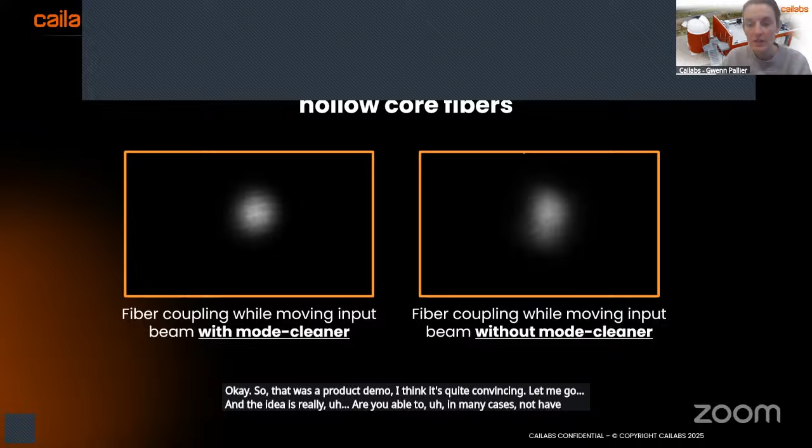Okay, so that was a product demo. I think it's quite convincing. Let me go to full screen, next screen. And the idea is really that you enable to, in any case, not have any light in the higher modes. And in any case, you cannot damage the fiber. So at worst, you can decrease the transmission, but you cannot damage the fiber. So that's really changing the game for fibering.

Okay, so I will be quick on the impact. Yeah, running out of time. We hear you with some interference for 30 seconds, but now it's working again. Okay, well, let's hope that my main message can be at least read on the slides.

So why it's a game changer? Well, first, it enables to have smarter factories. Typically, you can reduce the number of lasers per station, because whenever you have a problem in the laser, you don't have to switch to the second laser. You could just unplug and replug. You don't have to realign everything. So it's really, really impactful for the big factories.

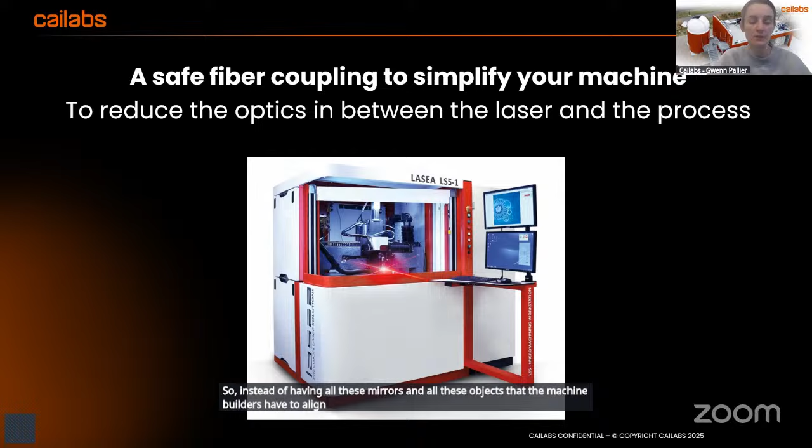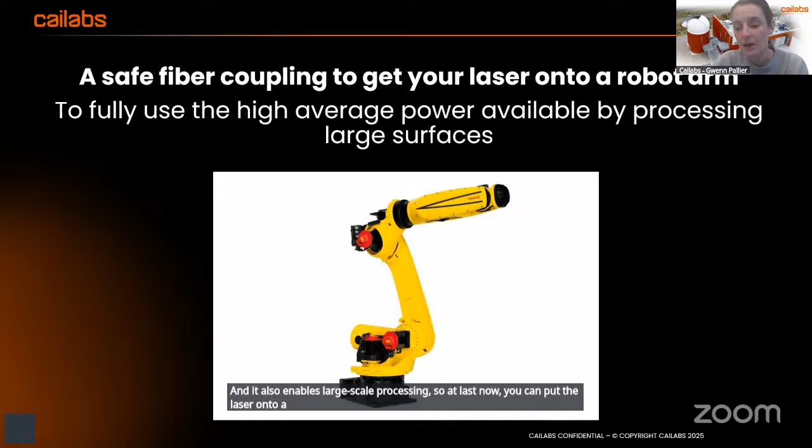It can also simplify the optical path inside a machine. So instead of having all these mirrors and optics that machine builders have to align, you just have the fiber going directly from the laser to the scanner. And it also enables large-scale processing. So at last now you can put the laser onto a robot arm, which is not possible with free space laser. So all this is really game changer.

I have a lot of technical results, but I will be lacking time for that, so I will be very quick. We have actually demonstrated that the transmission is not changing over time when we are in real industrial conditions. So it is stable over time, whatever the transmission is. Once it has compensated for the beam quality, it's actually really not changing. So it's important for process stability.

We also demonstrated that typically with a Monaco laser, when you are changing the power from 0 to 100%, the transmission is also not changing, which is very stable. Again, it's quite important for process stability. And we did demonstrate that we could divide, in that case, the pointing by more than 6 with such a specific setup. So that's it for today.

I hope I convinced you that by providing pure stability, we can actually make much more practical fiber injection, especially at high power. And this is it for me for today. I'm open for questions if there is time.

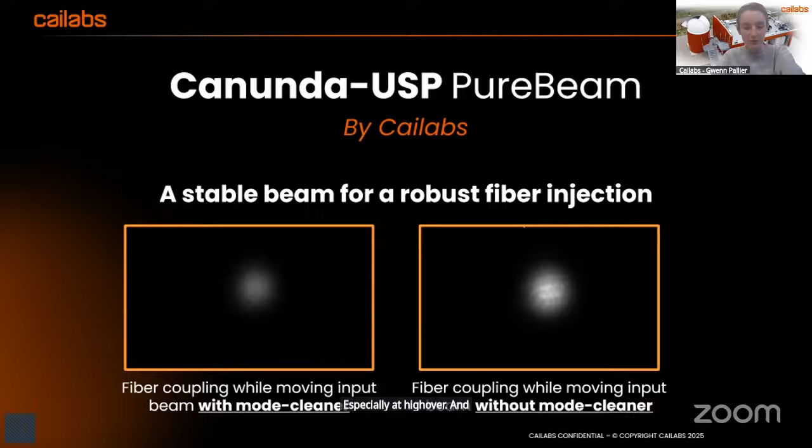I have a question regarding the power level of the lasers that your solution is working for. And as I mentioned to Mike, perhaps the requirements of the laser when connecting to a source, if you have any previous requirement, any optical component that you need before your system.

Yeah, it's an excellent question. It's not just power in the end, it's also about energy, and it's also about peak power. Right now we have two systems, one which is more optimized for lower power, up to 30 watt in the IR, and one which is optimized for higher power. It means there is more thermal management that we have specified, at 150 watt in IR. And now when it comes to energy, we have specific designs which can go up to the millijoule, but the off-the-shelf version is 500 microjoule at 300 femtosecond. But if you have longer pulses, we can take more energy. It's more about the peak power, the peak energy, than about the energy itself.

And the other question for beam adaptation—well, we made at last the move to have standardized input which are larger, so the beam adaptation is actually simpler now. Still you need to inject, so like any module you want to inject, you need two mirrors to adjust the injection angle and position. And then depending on the laser, you may even not have to adapt the beam size. But of course, one standard module cannot work with all the lasers in the world because they have very different beam diameters.

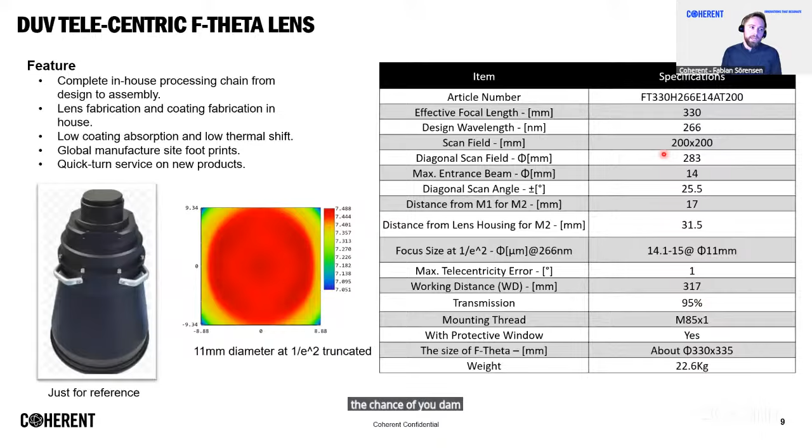So we encourage everybody to use beam expanders. The beam expander is critical because it's very unlikely that out of the laser we'll make a design that has a 10 millimeter or 50 millimeter beam output, since that's not really ideal for conversion efficiency. We could include the beam expander already within the laser to give you whatever output you require.

But that not only leaves you with less flexibility on your process, it also turns out that the beam expander is a really critical component, because at this point you are prone to having beam sizes smaller than your originally input aperture, which increases the risk of damaging the optics even further.

In our experience, it has been key to have beam expanders using high quality materials and high quality designs, to either have a fixed beam size or a variable expansion factor for your processes. Having this designed with calcium fluoride optics ensures you don't have degradation, and only have to align this once, rather than every couple hundred hours once the optic degrades — that was really important.

So these are the two key developments we wanted to do on our side, just as some other suppliers in the world have been delivering solutions for this. But we felt it was important that we can provide customers components of all three critical aspects. We don't have scanners — that would be the fourth critical aspect — but having the f-theta lens, the beam expander, and the laser really accounts for some of the key components when you want to design a DUV system.

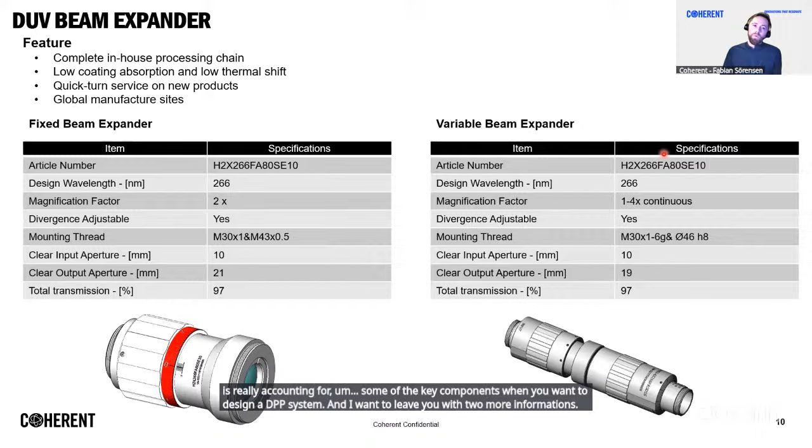And I want to leave you with two more pieces of information. One is we did a design based on these f-theta lenses. If you work with this kind of scan field size, 200 by 200 millimeters, you have to look into the spectral bandwidth of your laser. We've done simulations with different materials we've been using, different f-theta lens setups, and tried to see where the limit really is.

And what you can see here is that already with a spectral bandwidth delta of 20 picometers, you see a deformation in the beam profile through the f-theta lens.

That tells you, and this is kind of the extreme here, but this is a 200 picometer spectral bandwidth variation. So that basically means a 0.5, 0.4 nanometer laser spectral bandwidth will basically get you terrible beam quality out of the f-theta lens. And this jumps back to the beginning, why we analyze picosecond versus femtosecond against each other in these applications.

Because when you work with a femtosecond laser, you will be struggling at these sizes of f-theta lenses. So there are some advantages on the lasers themselves when using femtosecond for conversion efficiency, but when using the f-theta lenses, clearly the much shorter spectral bandwidth of a picosecond laser, which is currently at around 20 picometers, gives you big advantages when working with really these large size f-theta lenses.

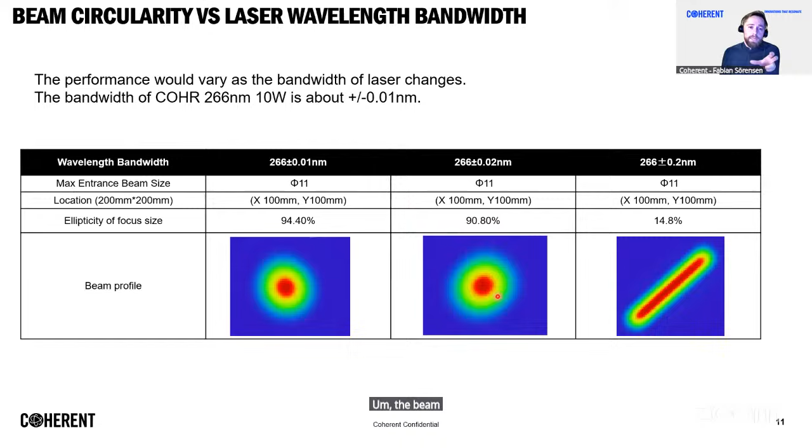So that's why we focus on the combination of a picosecond DUV laser, the beam expander, and this f-theta lens. And last but not least, I know I'm running a bit out of time, but just to leave you here, we've done this with multiple coatings. We do our coating ourselves in our facility in China. We do the entire development of the optic components, the sourcing of the material, and the coatings. So we have solutions for that and can provide specific solutions for your applications, not just for 266.

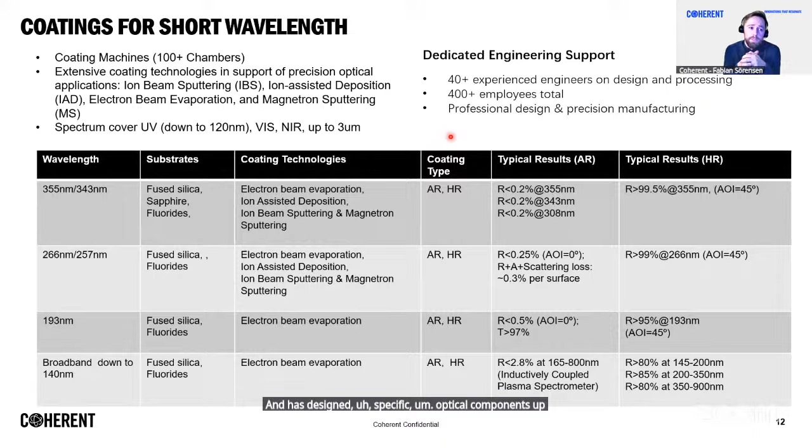We can go to shorter wavelengths, but we can also go to longer wavelengths, obviously, and we have the standard optics available. And this is something that the team in China has been doing for many years and has designed specific optical components up to complex optical systems. And that's what I wanted to leave you with.